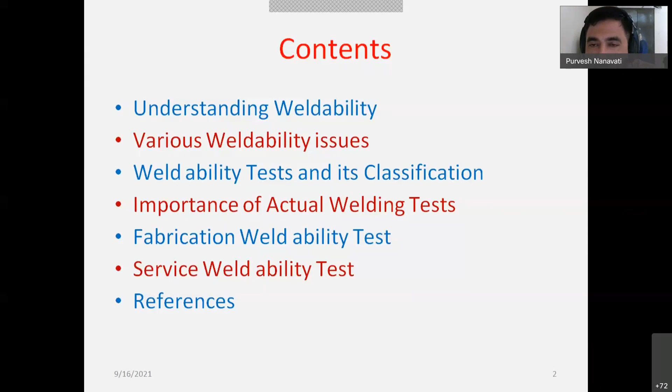On tomorrow, the 17th, during the morning session on weldability, because properly we need to understand the concept of weldability. So how does the American Welding Society define it? It defines it as the capacity of a metal to be welded under fabrication conditions imposed into a suitable designed structure and to perform satisfactorily in the intended service. So it is a complete definition.

It reflects the behavior of a metal or the capacity of a metal, and the fabrication condition is imposed by the arc welding processes, right? Or the processes we go for, whether arc or fusion welding processes or solid state welding processes, and into a suitably designed structure. So for the intended structure, it should perform satisfactorily for the intended service application.

The service applications may be in different areas, maybe high temperature, low temperature, cryogenic temperature, maybe room temperature, and for different parts and components. There are other definitions other than the AWS definition to understand this term weldability. In other terms, it is also known as the ease with which a metal can be welded to give the required service, right?

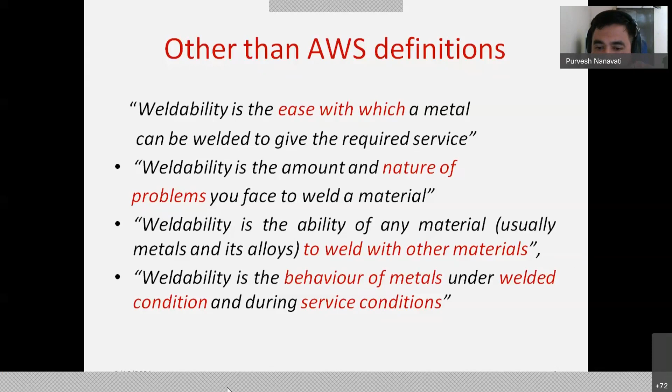Let's wait. Okay. Finally, there are also other definitions, like weldability is most often used to define a material's resistance to cracking during fabrication. Now, this is where the development of various tests comes in, because we need to find out the cracking susceptibility or the resistance to cracking during fabrication. So what can be called good weldability is more resistance to various forms of cracking during welding, requiring essentially no rework or no repair. So we can consider it a good weldable material.

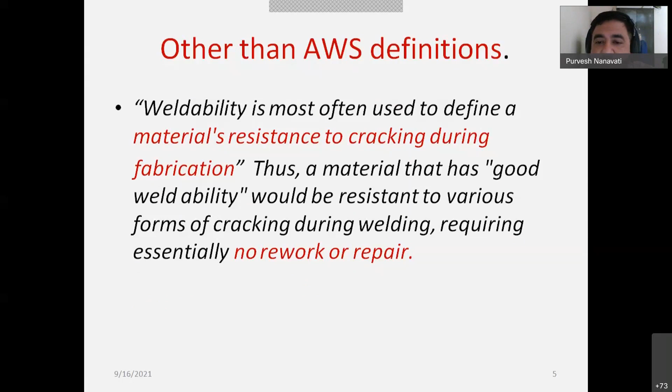Then, let us go through some issues in weldability. I'm not sure whether the previous speakers have told sufficiently about weldability issues, but I thought to slightly touch upon those things to understand the tests of weldability and classification. Anyway, so you have the cracking, right? In the previous slide, I came across the term resistance to cracking.

Now, the cracking can be in the weld or in the heat affected zone. If the cracking is in the weld, it is most of the time known as solidification crack or micro fissuring. And if it is in the heat affected zone, it may be due to hydrogen induced cold cracking, known as hydrogen embrittlement cracking, right? Or maybe liquation cracks or reheat cracks. Now, let me tell you something brief about the cracking in the weld.

Solidification cracks most of the time happen in the root pass or as a center line crack, particularly in austenitic stainless steel welding, or in non-ferrous aluminum or nickel-based alloys. In austenitic stainless steel, the phenomenon is that when there is not sufficient delta ferrite in the solidifying weld metal, 3 to 8% most of the time, then solidification cracking may take place.

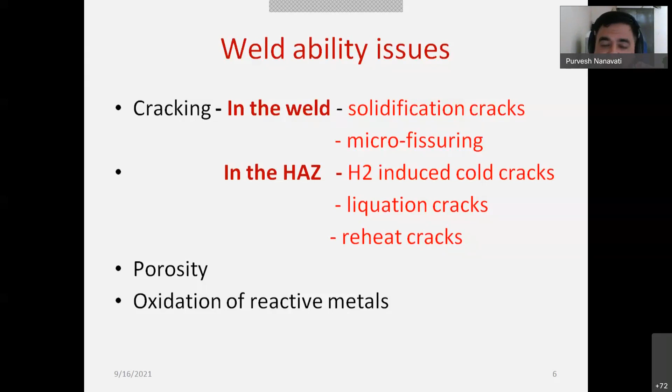Now there are other issues like porosity and oxidation of reactive metals, particularly when you're working with aluminum, nickel; they quickly form oxides like Al2O3, then NiO, then titanium. Okay. Porosity may be because of oxides, maybe because of hydrogen, maybe because of nitrogen gas, most of the time in nickel-based alloys and all that. So there are various issues. We will go through some issues, then we will see the particular tests

to assess the weldability. Then again, the reduced joint strength in the weld and heat affected zone is more of a concern with precipitation hardened aluminum alloys, right? Where there'll be a strength mismatch between the weld and heat affected zone. And there comes reduced corrosion resistance.

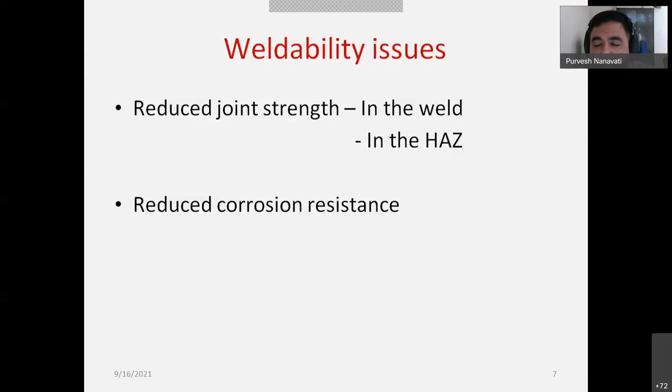This is the consequence of weldability, because most of the time, if you have heard of weld decay, you know that if there is more carbon, if it is not a low carbon grade stainless steel, then the carbon can combine with the chromium from the vicinity of the grain boundary and forms intergranular cracking. So it's reduced corrosion resistance. It's a phenomenon known as sensitization of the weld metal.

Okay, now I have some examples of weldability problems. So oxidation of reactive metals, most of the time, as I mentioned, aluminum, magnesium, and titanium. So you have to provide proper inert gas shielding and active fluxes. Then gas metal reaction or dissolution, when most of the time the weld pool is not protected. You have porosity due to nitrogen in steel and oxygen in copper, nickel, and due to hydrogen, you have porosity in aluminum and titanium based alloys.

Then there'll be vaporization of low boiling metals, right? So porosity in the zinc brasses may happen because zinc evaporates because of its low melting temperature, like 440, 450 something. Zinc evaporates very fast, so it leaves behind the matrix of copper. You have a porosity problem, so you have to use tin bronze filler at low currents.

And hot cracking in the weld, as I mentioned, is due to low melting constituents and impurities like sulfur, phosphorus, lead in the weld metal. These low melting impurities are segregated into the grain boundary. They form a liquid film. So under the cooling stresses, there'll be separation of the grains at the grain boundary, and you have cracking. So you have to use a two-phase filler metal SS electrode with sufficient amount of ferrite, and there'll be hot cracking in the heat affected zone.

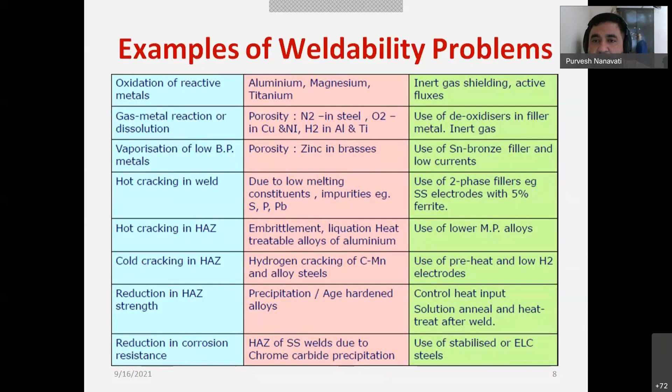Now, having understood the various weldability problems, it becomes important to understand the behavior of a material during welding or after welding during the service application. So weldability is process related. One of the important findings is that weldability is process related.

How? Because the fusion welding process involves high heat input from the arc or the heat source. So there will be solidification of the molten filler metal and fused base metal, and the heat affected zone. The heat affected zone is developed because of the thermal cycle. So there are metallurgical effects on both heating and cooling, because during welding the material is heated up, and during cooling it contracts. This expansion and contraction produces residual stresses, and the material's grain structure is also affected by the thermal cycle. So there is a metallurgical effect due to the heat input, is what I want to convey.

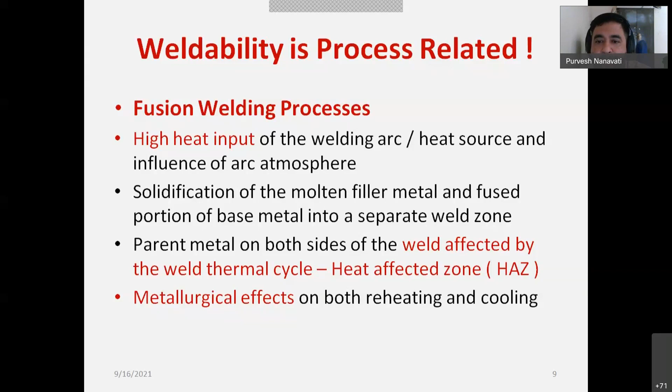Now, materials grouping for weldability. From the practical point of view, when we refer to ASME Section IX or the equivalent ISO 15608 standard, depending on the characteristics of the material, like their weldability, brazeability, and mechanical properties, ASME has assigned different numbers to ferrous metals, and according to their specified impact test requirements, group numbers within the P numbers. So the P number and G number, keeping in mind the behavior of metals, their weldability, brazeability, and their mechanical properties.

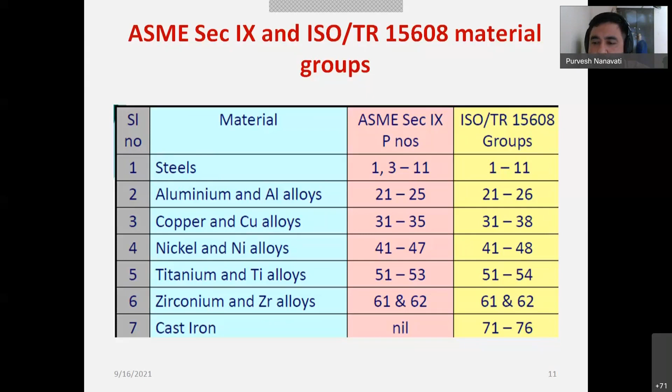As this slide shows, for steel, for example, the ASME Section IX code contains P numbers from 1, 3 to 11, whereas the ISO code differs. Likewise, you see steel, aluminum, copper, nickel, titanium, zirconium, cast iron. So they are grouped depending on their weldability. Why are they grouped? Because the fabricator would find it easy to compare or to join two dissimilar metals and select the filler metal accordingly.

Now, let us go through some pictures of weldability problems. That will be more interesting to know. In the first picture, the top right, first figure, you see hydrogen induced cracking. You see literally a crack. That crack is in the heat affected zone, and it is also known as delayed cracking.

Then second is hot cracking in the weld. That is centerline cracking. You see two plates joined by this weld joint, and at the center you can literally see a centerline crack. This is solidification cracking. And in the third figure, you see a very straight crack.

This crack is lamellar tearing. That is most of the time found in rolled steel or in steel containing some amount of non-metallic inclusions. So this picture is lamellar tearing. I wanted to introduce these pictures for a better explanation of the weldability issues.

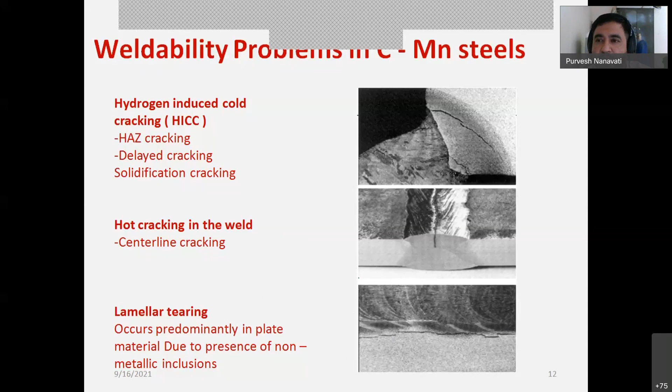Now we will move on to our main topic. By this time you better understand this. There are many issues. Actually, I could include 3, 4 more pictures and many such details of the weldability issues. So now we'll move to the classification of weldability tests, how they are classified. And their classification is very logical in nature.

So first, weldability tests are classified into 5 subtests: theoretical test, simulated test, visual examination, component sampling test, and actual welding test. Now, the actual welding test is again bifurcated into fabrication weldability test and service weldability test. These are of most interest because theoretical, simulation and visual tests may or may not give a clear picture of the weldability or the behavior of metals during welding. So it is more accurate to go for fabrication weldability test and service weldability test.

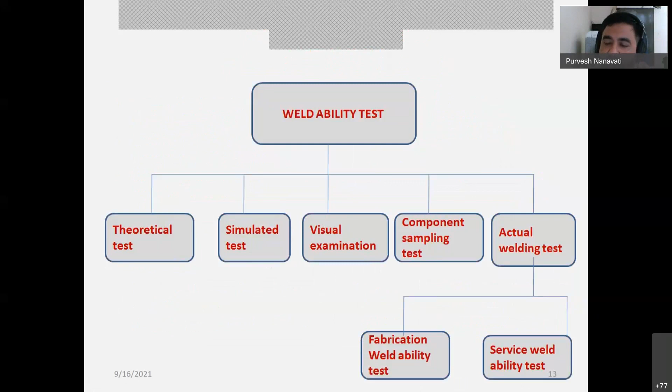Why should we go for the actual weldability test? That reason I'm going to explain just now. Actually, my slide has it: why prefer the actual weldability test?

Because the theoretical weldability tests do not take into account all the welding variables, right? Like in a previous slide, I'm going to explain some theoretical calculations. Now, I think we'll be able to understand better after this slide only.

So you can see that for carbon steels and low alloy steels, their weldability is judged by an empirical formula. It is well established, known as carbon equivalent. It is a formula reflecting the composition of the steel: carbon, manganese, chrome, molybdenum, silicon, nickel, copper. So you can understand these are the alloy elements having an effect on their weldability. So the higher it is, the more hardenable the material, right? And higher will be the susceptibility to brittleness, and at the same time lower will be the weldability. So it's a thumb rule, right?

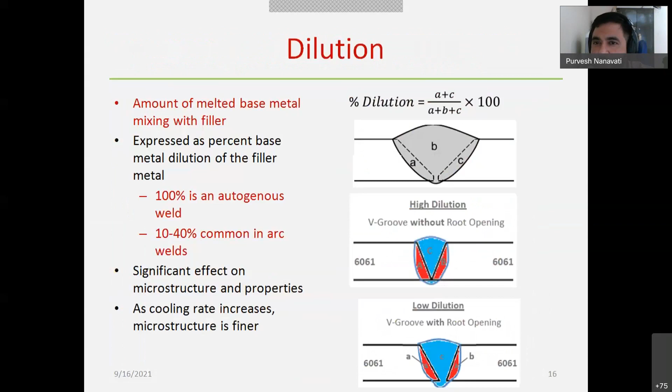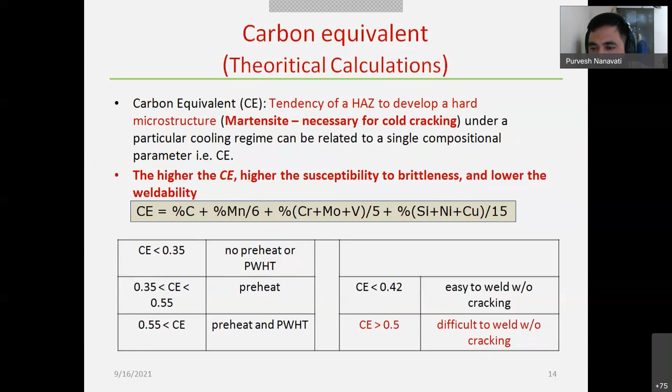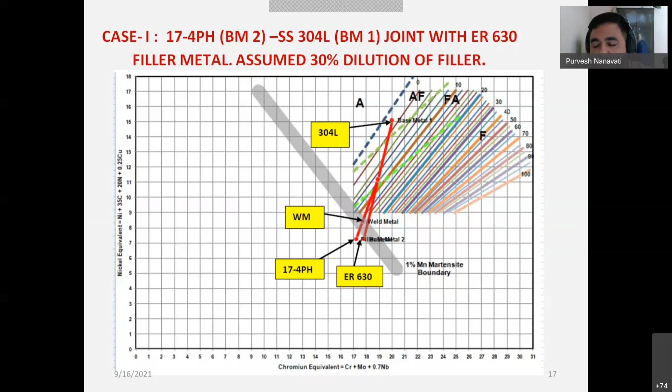Now moving further. Having discussed these theoretical tests, carbon equivalent and assessment on the WRC 92 diagram, you may realize they do not take into account the welding variables. Indirectly, we assume some dilution depending on the heat input. But during the actual welding process, heat input has a tremendous effect, and it may be different.

So these predictive diagrams will not give a clear picture, but they are mostly used for predicting whether the materials will be weldable or not. Otherwise, you have to go for the actual weldability test, the procedure qualification test. You have to prepare the test coupon, and if it satisfies, then your welding procedure specifications are approved.

And this will not take into account the welding variables, effect of preheat, electrode composition, and many more things. And on top of it, residual and reaction stresses, hydrogen induced and other conditions during heating and cooling. You may consider welding as a localized heating and cooling.

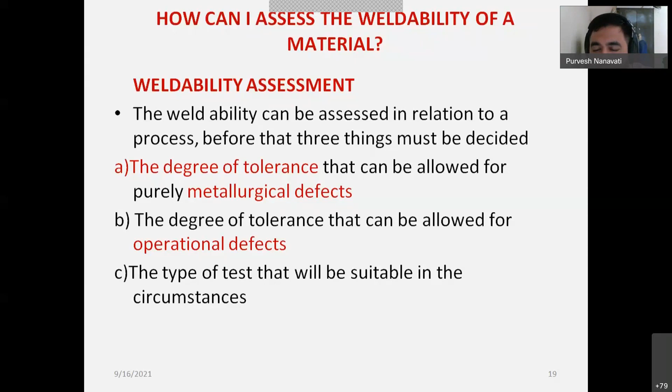That we will be discussing during our presentation. Now, fabrication tests, because fabrication tests are meant for determining the susceptibility of the welded joint to cracking, and they are grouped into three main categories. First is hot cracking test, second is cold cracking test, third is a test related to cracks associated with specific fabrication conditions or structures. The third is a very specialized or customized test. First and second are hot cracking test and cold cracking test.

Before we go further, what is a hot cracking test? It is the crack that may take place during or immediately after welding. What is a cold cracking test? It is the delayed crack, or the crack that may appear after the welding is over - it may happen anytime after welding is over, whether seconds, minutes, hours, months, or any time. Most of the time this is hydrogen-induced cracking. The third is a customized test, depending on our requirement.

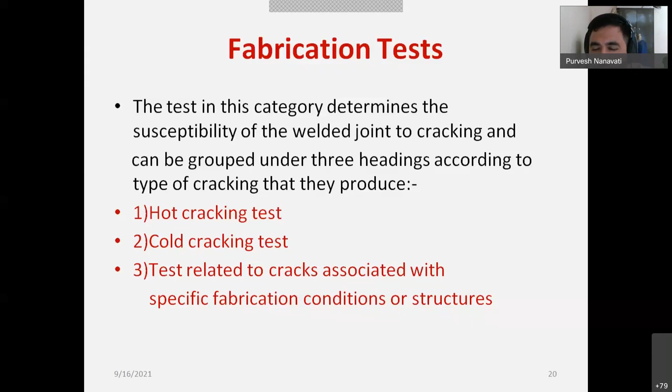Now, fabrication weldability tests under the hot cracking test include various standard tests like Murex, Houldcroft, Varestraint test, ring weldability test, Sigma jig test, and hot ductility test from A to F. And in cold cracking test, there are tests from controlled thermal severity test (CTS test), Tekken test, Lehigh restraint test, longitudinal bead weld test, and implant test.

Now we'll be able to discuss A to E, under the red square, and for cold cracking test, A, B and D. If time permits, we'll be able to go through all these tests, but these are the most popular tests. Out of these, I would say the Varestraint test and Sigma jig test, and the developed version, the ring weldability test, are most popular. They are used most of the time. For cold cracking test, the CTS test and Tekken test, and to some extent the longitudinal bead weld test, are the most important tests I am going to discuss in this presentation today.

Okay, now to begin with the Varestraint test, the first of the hot cracking tests. Okay, so... sorry, my slide stuck.

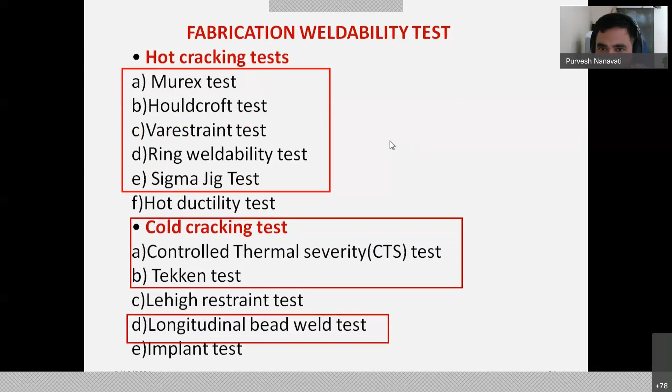Okay, now, Varestraint test. You stress the word Varestraint. The word variable, VA, comes from variable, and restraint comes from restraint, right? The Varestraint test. So you can understand from the first impression that this is a test in which we have to vary the restraint. I hope, being from a metallurgical or mechanical background, you better understand restraint, because I've mentioned the restraints posed by the surrounding base metal during heating and cooling. So we are inducing a mechanical restraint here, to assess the weldability of a material under mechanical restraints.

So, long back in the mid 1960s, W.F. Savage and C.D. Lundin, from the Rensselaer Polytechnic Institute, designed a way to assess weldability of materials in terms of hot cracking tendencies. They were the first to term the hot cracking tendency. So this test is used to quantify and rank a material's susceptibility to hot cracking. When you have a number of materials, guidelines are available so that you can rank materials depending on their susceptibility to hot cracking.

And then there are many modified versions, extensions, and modifications to the basic Varestraint test - longitudinal, then transverse, then spot - and these were all developed gradually over time to effectively quantify or assess the mechanism of the crack. Because, as you know, most of the time this crack develops because of the eutectic liquid. I had mentioned previously that because of low melting point elements present in the solidifying weld metal, the grain boundary will be wet by the eutectic liquid, and it backfills the crack as a function of eutectic composition. The eutectic composition is very interesting to know, and there is plenty of research ongoing even today in this area.

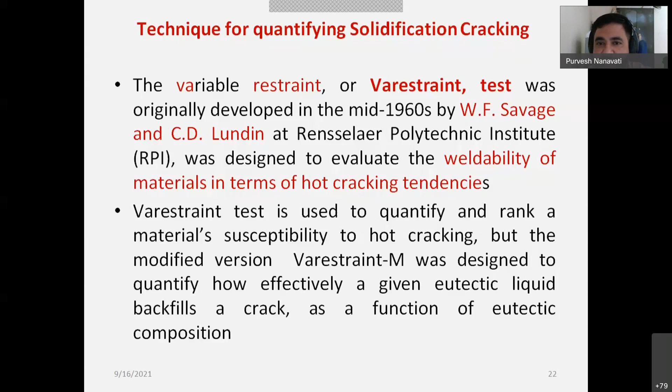So, moving ahead, the first and most basic test is the Varestraint test. This test's basic setup looks like this. What you see on the left-hand side figure is an 8 by 4 inch plate, and you see the weld joined longitudinally, and this plate is fixed over here. Now it is free at this end, just like a cantilever beam. When the arc moves from the free end to this end, most of the time, through the help of a plunger from the top, it will be bent on this die. This die has a designed radius on which it will be bent, and you will be studying this area, particularly your molten weld pool.

This molten weld pool is the area of your interest, and you will check it for the development of cracks. You can better see this in the enlarged view - this is where weld deposition started, and this is where the weld ends. By the time it's solidified, the force is applied at its free end. As a result, there will be a sufficient amount of strain - we'll call it augmented strain - developed on the fusion zone and the heat affected zone. So, depending on susceptibility to crack, or the chemical composition, the material may or may not develop a crack.

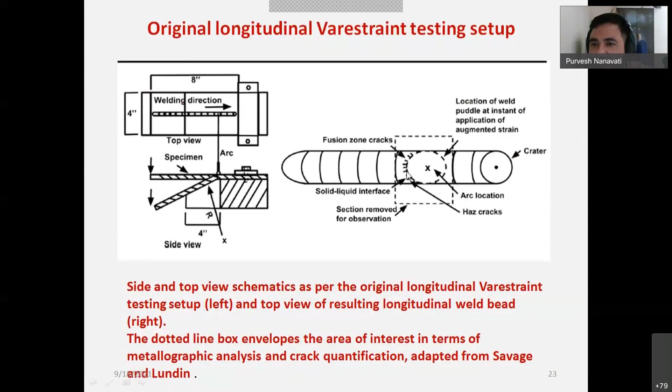And this type of test produces cracking in both the fusion zone and adjacent heat affected zone. You could see this from the previous picture. This is because of the bending stresses produced by the applied force from the top. What will happen? This area will be bent, and so the fusion zone and the heat affected zone will be under stress.

Now, moving ahead, what do you see? It is sometimes very essential to know whether the crack is originating from the fusion zone or from the heat affected zone, or whether it is HAZ liquation cracking or solidification cracking. Because we knew from the previous slide that solidification cracking takes place in the weld metal most of the time, and liquation cracking takes place in the heat affected zone. So it is difficult to separate out. So this is a limitation of this test.

No, sir, it's not visible because you have just shared the Microsoft PowerPoint presentation screen only. If you will share your entire screen. Okay. I think I need to share the screen for video, right? Yes, sir. Fine. And now I got it. I think I should stop share, and I need to share video again. Just wait. Please spare me 2 seconds to do this. Now, what I'm going to share is a VLC media player screen. There we go. I think now the screen is sharing, right? Am I right? Yes, sir. Screen is visible, sir. Okay, fine.

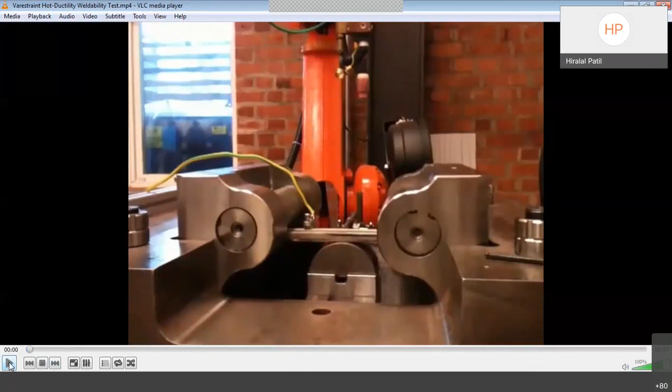Let us go through this video. So you could see a positioning of the torch. So you could see a transverse Varestraint test. Now the arc is started and welding is started. Now, as soon as it reaches a certain position, there will be a pressure from both the rod, from both its ends. Oh yeah. Now you hear literally a sound of cracking, right?

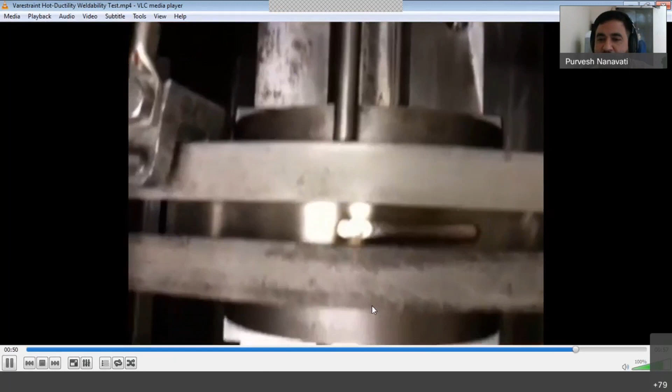Now you are going to see what actually happened on the top. I hope this video will take us over there. Let us take a look. See, did you see the kind of cracking? Yes, here, a small crack, right? A very small crack, may not be clear. Would you like to see it once again? Please have a look. Oh, right.

Now there are many such videos on YouTube. You could have a look at them. I could only include this Transvarestraint test video for you, just to give you an idea. You see this is a mechanical... You see a thermocouple wire, right? This red and blue color. Sorry, I was late to show you, but I think you must have observed it very closely. You must have observed the test setup.

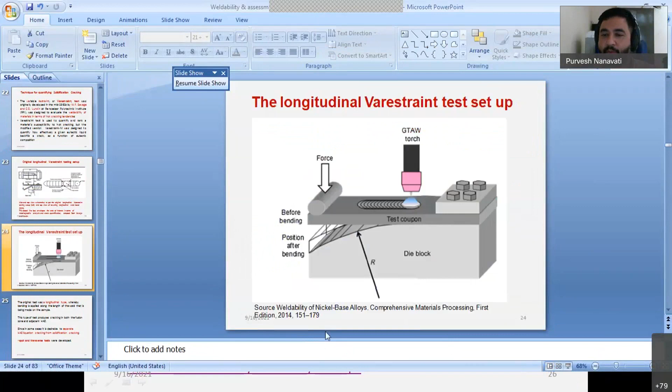Now I'm going to stop the video and share my screen once again. Sorry, I think I need to go to the slide where I stopped. There we go. I was here. Can someone please confirm whether the slide is visible? Yes, sir, the slide is visible. Fine, great.

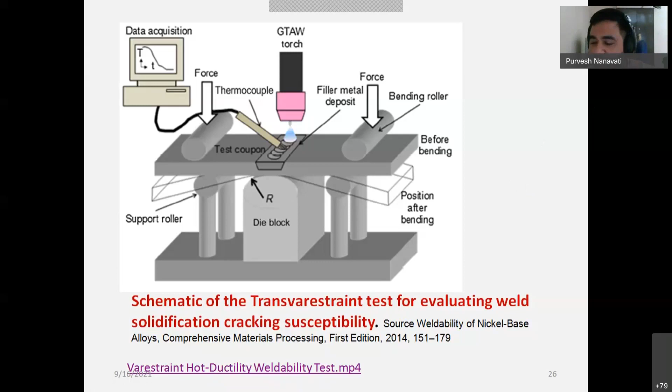Next, Transvarestraint applies bending stress across the weld and restricts the crack to the fusion zone. So there is little or no strain applied to the heat affected zone. It is in the transverse direction, right? So most of the stress will be concentrated on the fusion zone and less on the heat affected zone.

So there was a further modification, the spot Varestraint-M test. M stands for modification. It's a modification to the original test where only a spot is welded, and this small spot weld develops a susceptible adjacent microstructure. So you simulate a heat affected zone using a spot weld, and this spot weld will have an adjacent microstructure.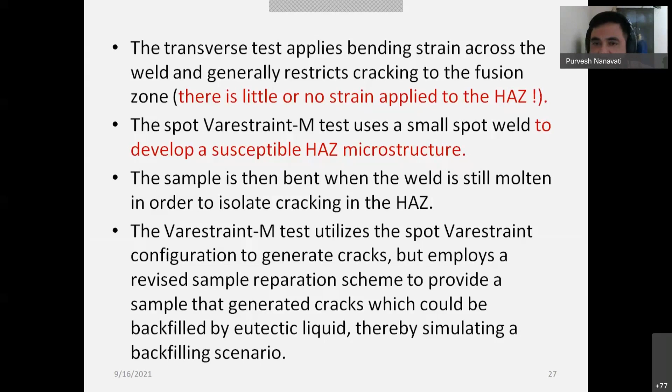The test setup is something like this, as you see in the picture. Instead of making a weld on the line, you see that only the weld is made on the spot. I'm trying to use this cursor. It automatically went up. Now you see that only a spot weld is made, right? And you must be seeing that there is a HAZ crack.

So this is a more accurate test to judge the susceptibility of cracks in the heat affected zone in comparison with the previous transverse test, right? Because the limitation of the transverse test is that most of the stress is concentrated on the fusion zone. This test will produce stress on the heat affected zone. So it goes with the same test setup, right?

And now you see a formula over here. I'm coming to this formula, but this is a schematic illustration of the Varestraint test setup. All these sources I have taken from Dr. J.C. Lippold's book. It's a very popular book, Welding Metallurgy and Weldability of Steels. At the end of the presentation, I will also mention his latest work on the assessment of weldability of metals. Okay.

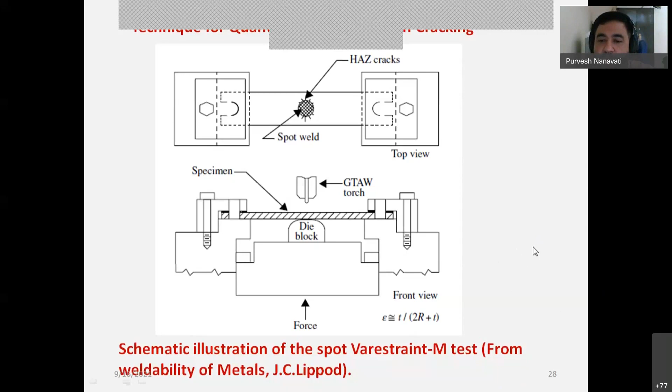So this is a picture from the same book. It is a A-286 stainless steel at 5% strain. The strain is also calculated here, at a 5% strain. You would literally see a crack in the heat affected zone, right?

This is the HAZ, and this is a spot. This is the weld nugget, and surrounding it you see a less dark region, which is the heat affected zone, and in this heat affected zone the crack is formed, right? So it is a spot Varestraint test sample in a plan view. This is sourced from the same book.

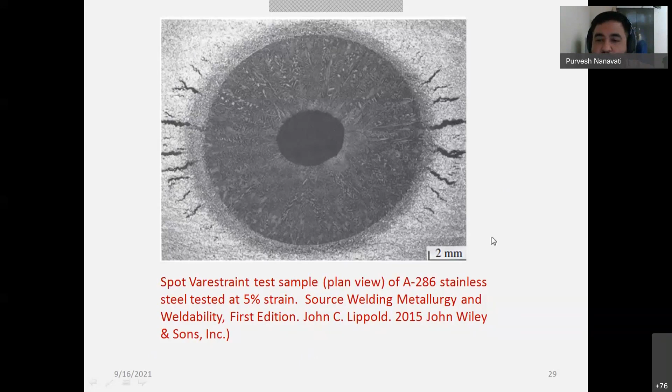Okay. Now you would have seen that in most of these tests the GTA welding process is used, but you could also include other welding processes. First, the standard is the GTAW welding process. Otherwise, you could customize it using your other tests as well. But this could be without filler metal deposition. So these tests are usually autogenous, because you did not see any filler metal, right? You did not see deposition of any filler metal or dipping of any filler metal into the weld pool.

Only the arc is generated and the arc is directed on the test coupon and the test is conducted, right? But filler metal deposits can be tested using special samples. There is a provision that if you want to find the compatible filler metal, you could first develop a molten weld pool and dip your filler metal just like GTAW standard practice. You can carry out this test with the help of filler metal. So you can qualify filler metal for the particular test setup.

And the bending is normally very rapid, right? Only 2 to 10 inches per second. So it's a very fast bending. You could see it in a video. And now, the most important quantification part is here. The augmented strain is controlled by the use of interchangeable die blocks. Augmented strain means the varying degree of strain, because we have known this word Varestraint, so variable strain. Augmented means which you can keep on changing by changing the die blocks.

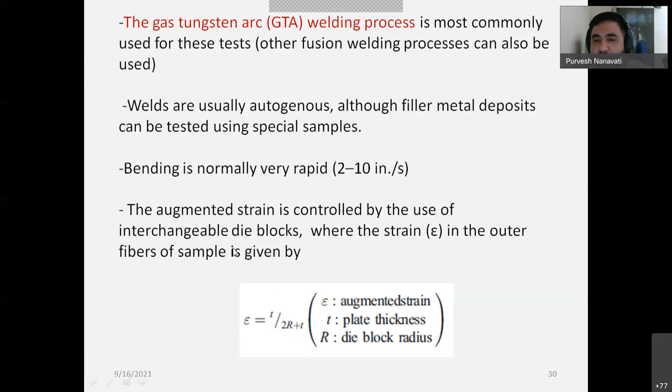So now, measurement of crack lengths on the surface of the as-tested sample using a low power microscope. How would you examine the crack? Using a low magnification microscope, with a 20 to 50x microscope. And the total crack length is the summation of all crack lengths. There are various concepts like TCL, total crack length, MCL, maximum crack length, and the most recent concept is maximum crack distance, that is MCD.

Now, most people measure MCD, maximum crack distance. Previously, people were measuring the maximum crack length, then summing the different crack lengths. Now they have come to the conclusion, by years of experimentation, that the most accurate is to measure the maximum crack distance, MCD, the distance through which the crack has propagated, right? MCD. Okay.

Sorry, my slide is not changing.

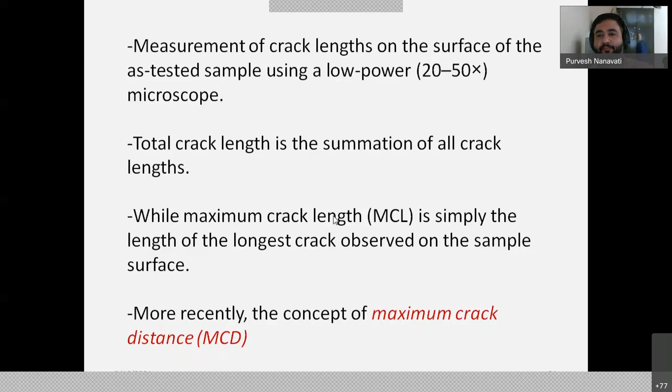Okay, now, what is the technical concept behind this test? We have seen this test in slides, we have seen visuals also, but we also need to understand the technical concept behind the test, right? So I included this technical concept because we are estimating the saturated strain. I hope you understand why the word saturation, because saturated is something which is sufficient, right? Saturated means complete in itself, saturation.

So look at this graph, which is developed as a result: maximum crack distance, MCD, versus augmented strain. When you plot a graph using these two, you would see that for solidification cracking in the fusion zone there'll be some amount of strain already. That is known as threshold strain. It means you require some strain to develop the crack, right? There is only initial cracking. That is known as threshold strain.

Now, you will be entering a different region of augmented strain. It means you go on changing the die radius, and you try to see after which level of strain your maximum crack distance becomes constant at an augmented strain level, right? So you could understand that below is the augmented strain.

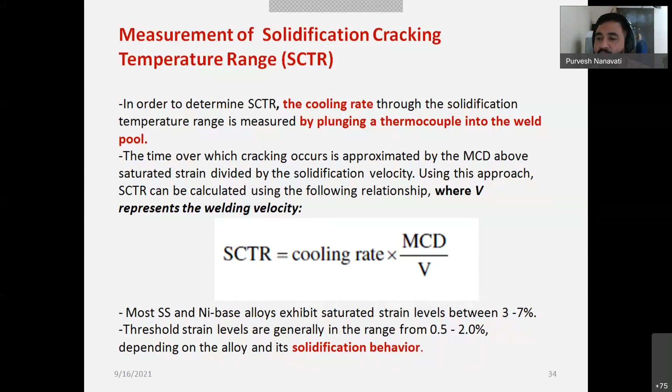For stainless steel and nickel based alloys, saturated strain levels generally range from 3 to 7%, and threshold strain levels from 0.5 to 2%. It means you require 0.5 to 2% minimum strain to develop the crack, and your sample made of stainless steel or nickel based alloy will show a saturated strain level. It means the maximum crack distance will become constant after, say, 7% strain level, as per the previous slide, right? I hope everyone understands this.

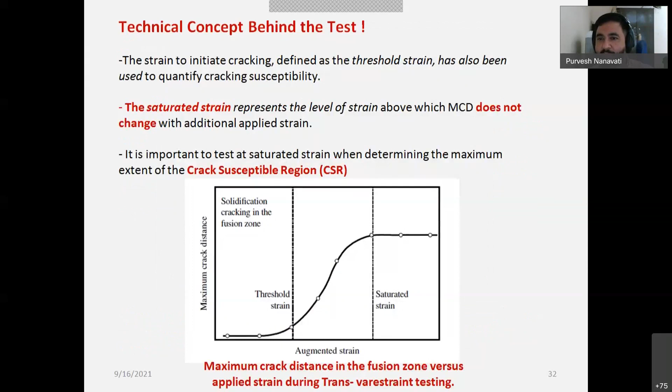It means if you have a thermocouple, a temperature monitoring system and a stopwatch. These days these are all automatically done, and this formula is also automatically calculated, but these are the technical fundamentals I thought to explain with the help of this very well-written book. Okay, now you will see this

So you could figure out this SCTR by multiplying the cooling rate with MCD divided by V. As a result, you will see a particular band or zone where there is highest susceptibility for cracking. TL stands for the temperature of liquidus, and TS stands for the temperature of solidus. So this is the range which is most susceptible, in which a crack can happen. Okay, this is how it is calculated.

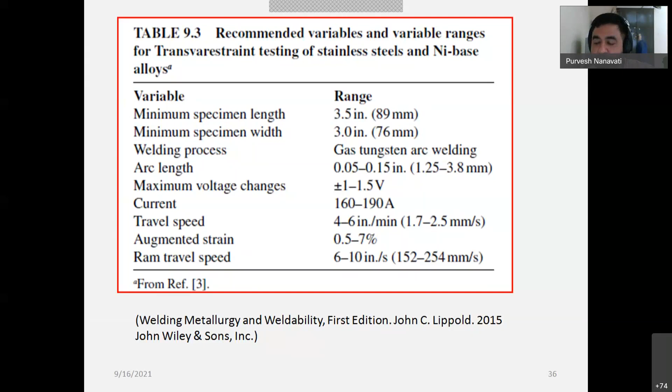Now, this is the most important information I have captured from this same book, table 9.2. You would see there is also a role of solidification mode. Because in the previous WRC 1992 diagram, I pointed out A, AF, FA, and F. These are the different solidification modes. A means the weldment undergoes solidification completely as austenite. AF means primary austenite, secondary ferrite. FA means primary ferrite and secondary austenite. And F means it is fully ferrite.

For example, austenitic stainless steels like 304, 316 most of the time solidify in FA mode, and hardly in AF mode. But the ferritic-austenitic duplex stainless steels solidify in F mode. Likewise, you can see 304 and 316 have a primary solidification mode of ferrite. So when the primary solidification mode is ferrite, there is no danger. You could see there is a smaller solidification temperature range.

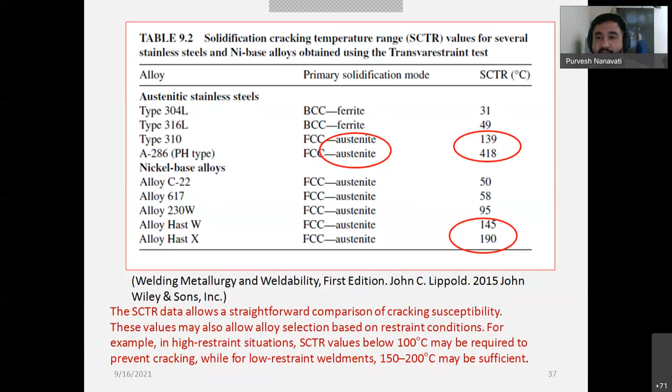Now, how is this test performed? This is another test, the circular patch test. It is meant for austenitic stainless steel and aluminum welds most of the time, and most of the time it is done in the industry; it is industrial practice. What they do, people here may start with some block of say 1 inch or 1.5 inch or say 2 inch thick block.

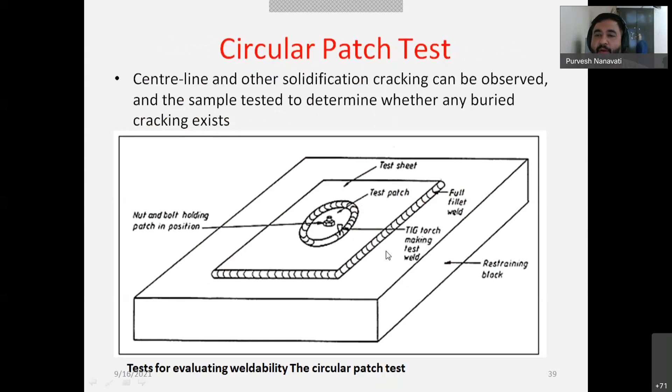Now you can understand the test material is positioned so that the gap around the test patch is constant. Because you would see the gap is continuous, right? The gap is constant. From all sides of the test piece, you could see that the distance is the same, right? Now, the weld between the patch and the original plate is made following the circumference of the patch.

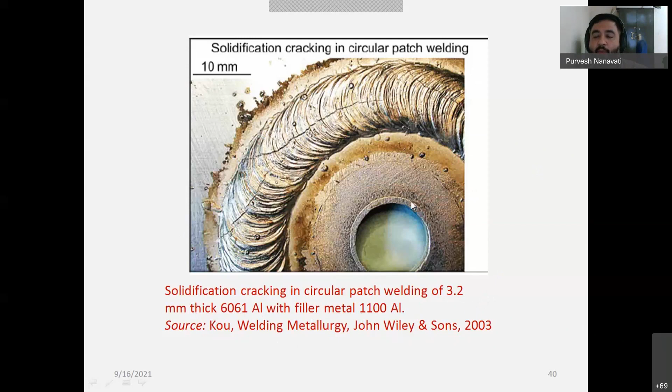You could see a crack, and at this scale of 10 millimeters, you literally see a large crack of centimeter size, right? This is solidification cracking in circular patch welding, right? Now this is a figure of circular patch welding of 3.2 mm thick 6061 aluminum with filler metal 1100. So this base metal was 6061, an aluminum silicon magnesium alloy, and 1100 is the filler, right? Another case is a hot cracking test or Murex test.

This test setup is not complicated to understand. You will see a plate of say 10 to 15 mm thick, and the test plate is 50 to 70 mm in width.

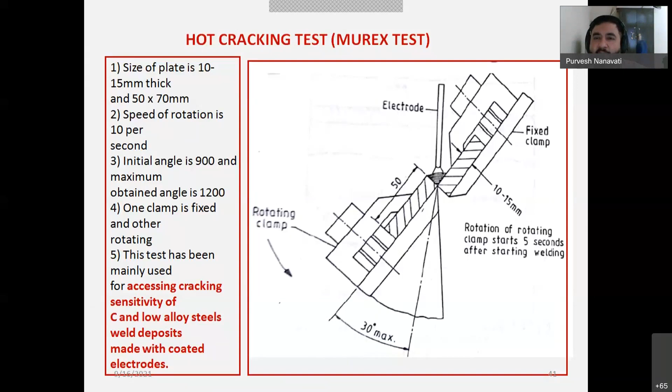This is known as the Murex test, named in honor of the inventor, but it typically falls under the hot cracking test category. It is the same information.

After 5 seconds it is bent, at 1 degree per second, and rotation is 30 degrees, and strain is developed. The length of crack that appears after straining is measured.

This test is used for obtaining comparative information on similar or dissimilar welding fillers. It means if you are joining two different materials, carbon steel and stainless steel, and you go for 308, 309, and you want to figure out the correct substrate with 308, 309, or 310, then you can go for this test.

You get comparative information, but you can use different brands or different manufacturers' electrodes and have a comparison on the ductility of the weld metal. You could do this using this Murex test. This is a practical application.

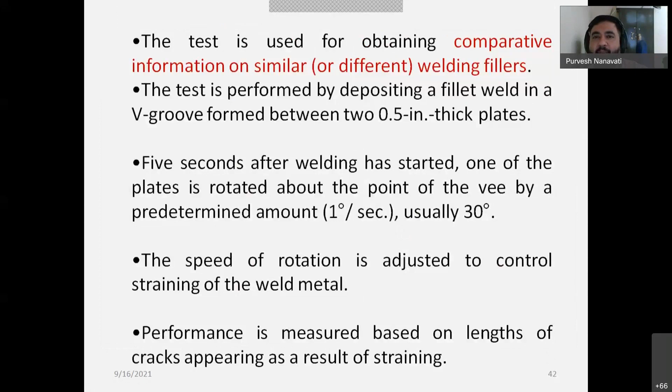Now, next is the Houldcroft fishbone test. Now you understand the word fishbone. This test plate is of a typical type.

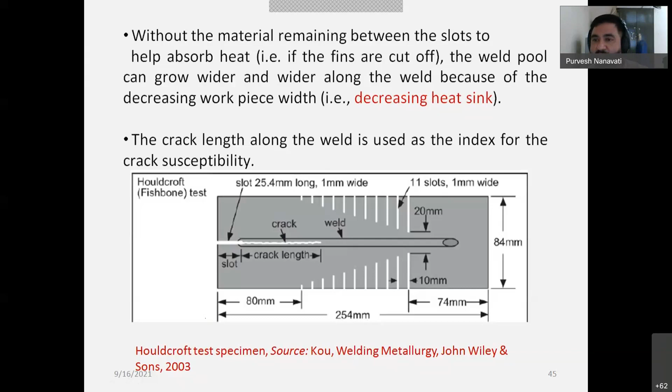This Houldcroft, or fishbone test, is the index for the crack susceptibility. Crack length along the weld is the index for the crack susceptibility. This is a source from Sindo Kou.

Now, the Sigma Jig test. This is, most of the time, the latest test developed by the Oak Ridge National Laboratory. It is the latest test because it overcomes the limitations associated with the Varestraint testing, particularly thickness limitations. I would not say the Varestraint testing is no more valid; it's a very much valid test. It is the most accurate test to assess the susceptibility of different materials.

But it has limitations associated with thickness, particularly thickness greater than approximately 3 mm. You can go for the Varestraint test. But if your thickness is less than 3 mm, you will go for another test, that is the Sigma Jig test. So for the Sigma Jig test, you can go for thin sheets of material, like 50 by 50 mm, clamped in fixtures.

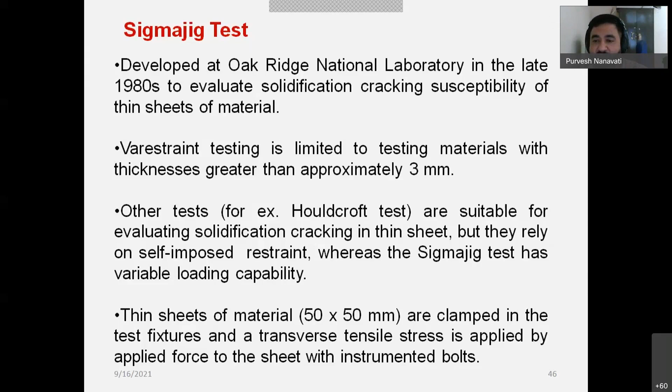Not only one but multiple coupons can be evaluated in the course of this qualification test. When you go for multiple coupons, you have to identify the low stress level for the first test sample. Then this will be linearly increased in each subsequent sample until centerline weld solidification crack is initiated.

So you first start with the test sample at a low stress level, then you start increasing your stress level, going up until your centerline weld solidification crack is initiated. It means you start with say 3%, 4%, 5%, and say at 7% or 11% your crack is appearing - that is your stress level.

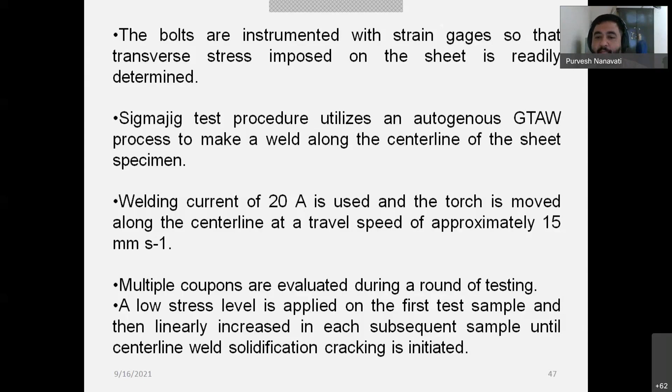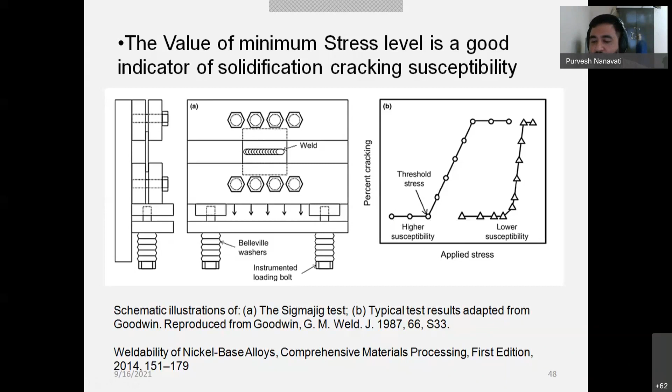Now we'll move to a cold cracking susceptibility test. I think I need to conclude the session in 10 to 15 minutes. Until now we have discussed the hot cracking test; now we'll go for the cold cracking test. You know that the cold cracking test examines the susceptibility of material, particularly for hydrogen-induced cracking, because these are delayed cracks - they don't take place immediately during or after welding, but after some time, under cold cracking conditions.

So most of the time the focus is on HAZ cracking, and there is a CTS - controlled thermal severity test.

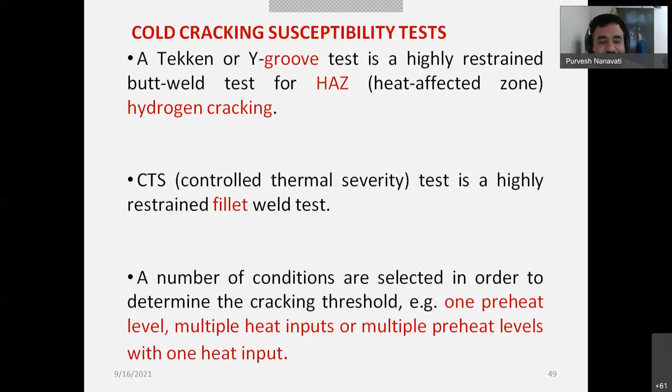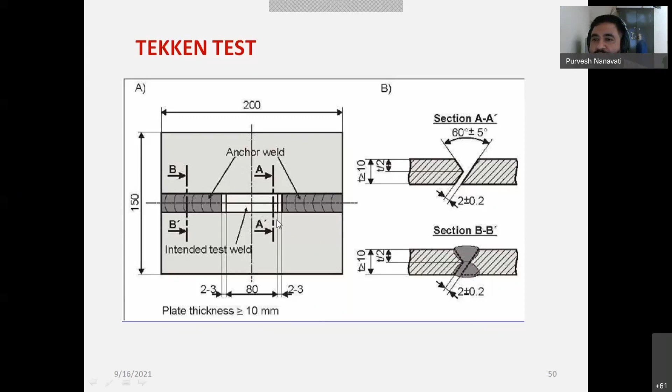This geometry, the Tekken test, is used to examine a single run butt weld, determining the preheat temperature required for the test condition. Because when you have a preheat, the solidification time or cooling rate is controlled, so the hydrogen has a chance or opportunity to escape out of the weld material or weld metal. As a result, there will not be traces of entrapped hydrogen, and you will be free from any possibility of hydrogen-induced cracking.

So this is the objective of the test. For the number of test coupons, you can go for 1, 2, 3 for each condition, and decide the preheat temperature - you start with some 25 degrees Celsius, 30 degrees Celsius, going on checking different preheats and the possibility, but the test duration is more than 16 hours.

Test duration is more than 16 hours because you have to see the cold cracking - you have to examine the cold cracking susceptibility. So you have to wait up to 16 hours to observe the test coupon for crack development.

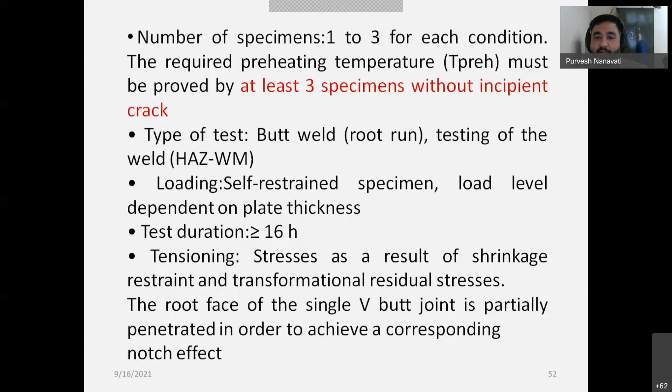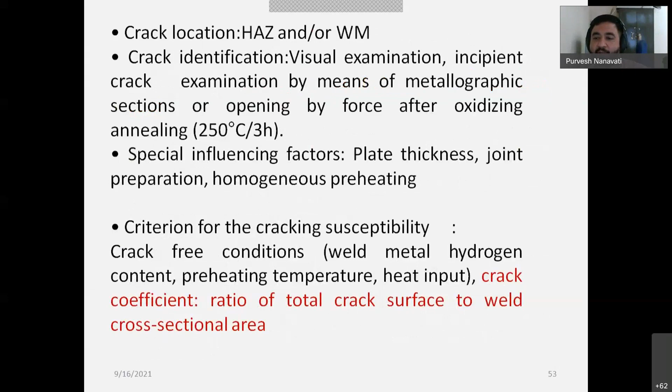Now, crack location is the heat affected zone, obviously, because the thermal cycle affects most of the time the heat affected zone, where martensite would be developed, and martensite is a very hard microstructure and brittle phase. So hydrogen can reduce in it and have more effect on HAZ. Now, the crack coefficient - ratio of the total crack surface to the weld cross-section area - is a criteria for the cracking susceptibility. Now, another test is the controlled thermal severity test, CTS.

So, controlled thermal severity test, I'll explain in brief. When the heat source is moving, the plate is throwing out the heat, right? So, depending on the section thickness, there is a thermal severity number, TSN number. So for a 6 plate thickness, TSN is considered by standard as 1.

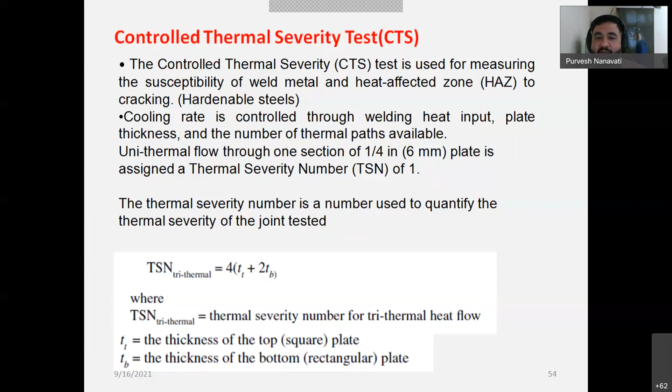So TSN for the tri-thermal, it means when the thick sheet is there, along the thickness and depth direction, heat will be dissipated. So using this formula, you can calculate the thermal severity number, but you can consider 1 for the 6 thickness. So, controlled thermal severity test, how the test setup will look like. You have to just weld this test coupon with the anchor weld. These are known as anchor welds, right? And known as restraining welds also, because here you are restraining the heating and cooling of the weld, right?

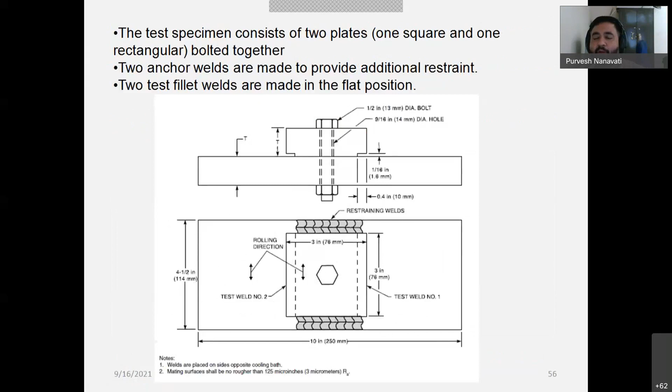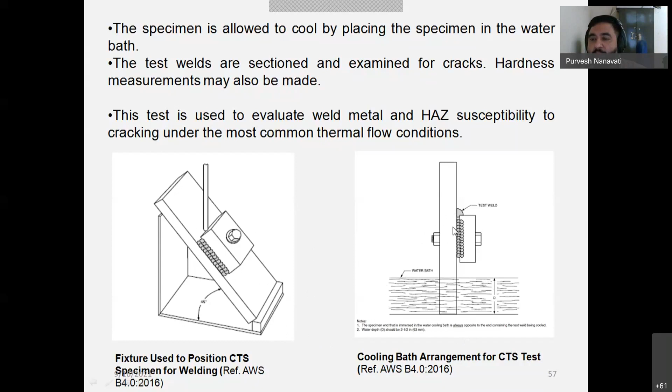Now, what to do? First, you finish the weld. Now, in a particular fixture, the fixture is just like this. It is a fixture at a 45-degree angle. That is as per AWS B4.0. Most of the time, weldability tests you will find in AWS B4.0. When you finish the weld, you have to put the specimen into the water bath, keeping the weld joint part without touching the water, right? So in this way you have to put the test specimen.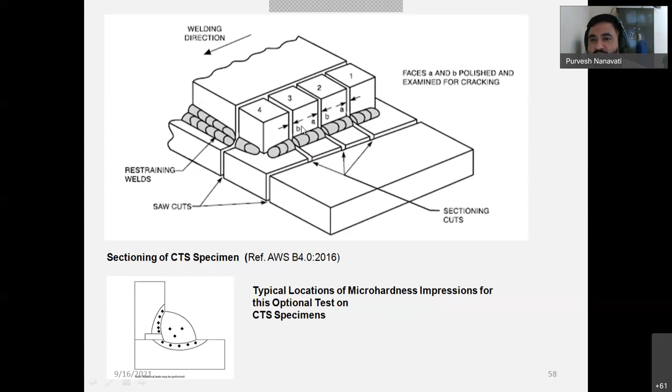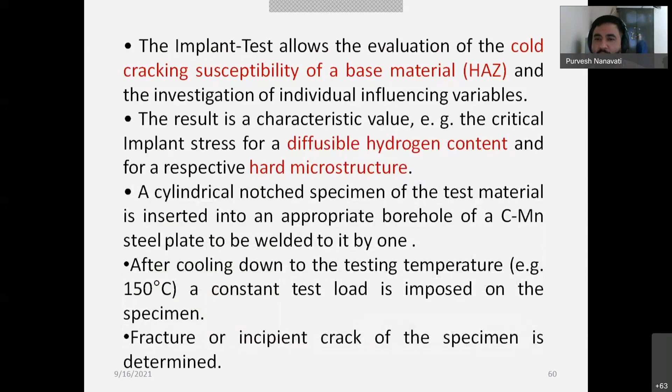You will perform this test, and you will subject it to tensile stresses, and you will assess the cracking susceptibility of the base metal. Particularly, after cooling down to 150 degrees Celsius, the constant test load will be imposed on the specimen. This specimen is subjected to constant load F. You will apply the load and see at what point it cracks. Now, after cooling to room temperature, below 150 degrees Celsius, you have to examine for the fracture, right? So it's showing the cold cracking susceptibility.

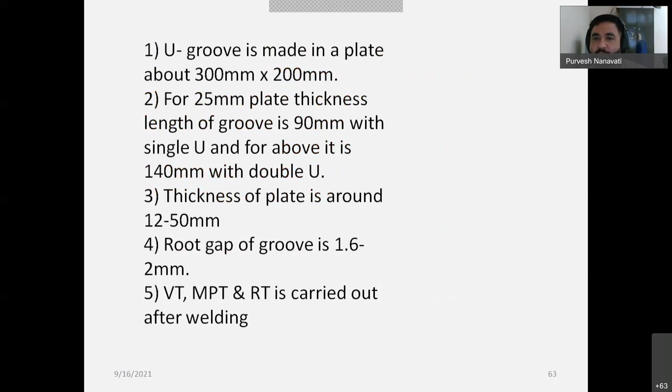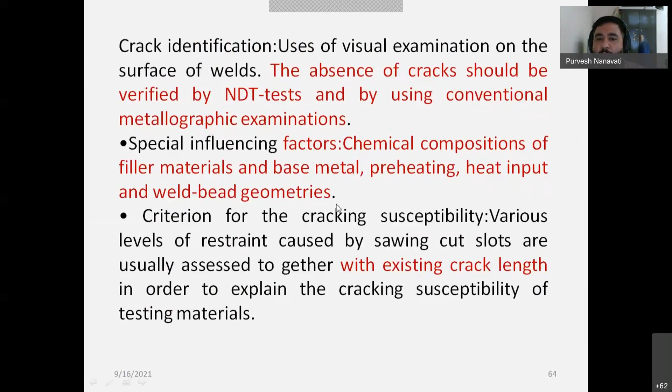Now, this is information on how you can do it, and crack identification is by NDT method. When you perform this weld, you have to observe these cracks by the NDT method because these cracks will be very fine in size, invisible to the naked eye. So you have to go for the NDT test and conventional metallography examination, and you can work out the chemical composition of the filler metal and base metal, preheating, heat input and weld bead geometries using this test.

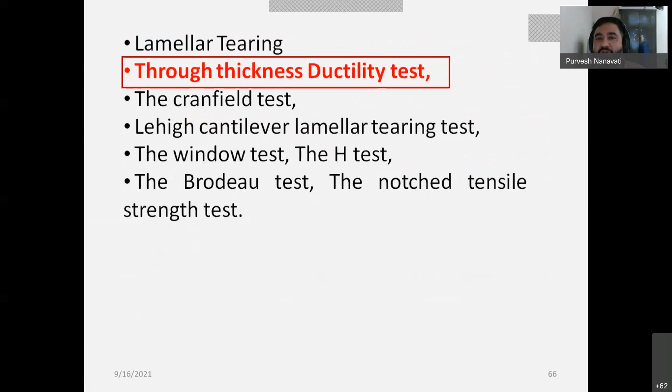So other tests are for lamellar tearing and reheat cracking. These are for the heat affected zone. And one test is the through thickness ductility test. That is most of the time for determining lamellar tearing. Now, this is just a test schematic. You could see, not in a transverse area but in a longitudinal direction, your specimen will be like this, opposite to the rolling direction. And this is a typical test specimen dimensions.

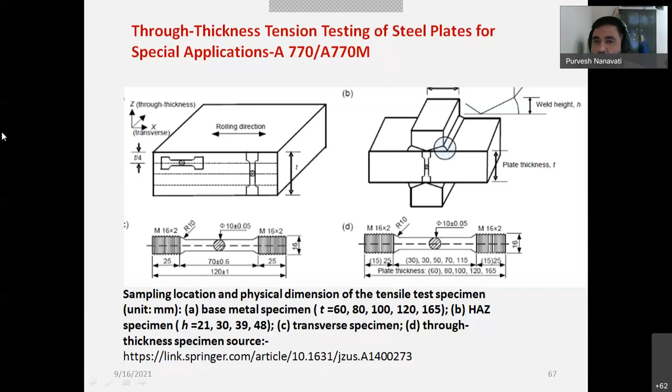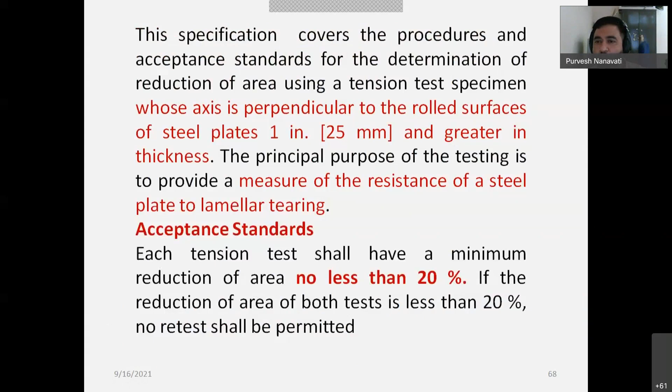Now last is the hot tensile test. This hot tensile test is conducted in a simulated weld thermal cycle. So what do you do? You apply heating and cooling. Likewise, you see temperature versus time. You see heating, and cooling between 800 and 500. Okay, fine.

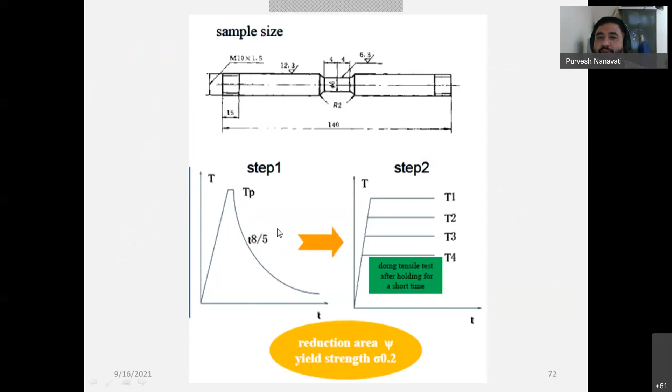So last test is a bend test, right? Actually, I'm running out of time. I think by 5:30 I should conclude this.

Now, this test is the most accepted test, and most of the time this is done by the welding industry as a procedure qualification test, QW 160 bend test, with 90 degree, 120 degree, and 180 degree bend tests. Depending on the positioning of the root, the positioning of the stretched fiber, it is either a root, face or side bend. For thickness greater than 12 mm, you will go for the side bend test.

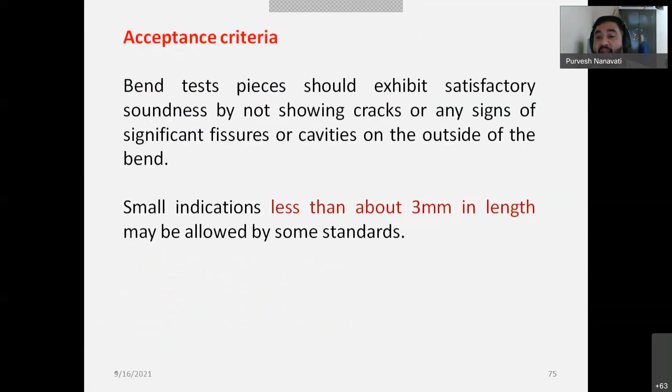And the acceptance criteria is that the crack should not be more than 3 mm in length in any direction, right? So the bend test is a satisfactory test in industries for measuring the soundness of the material. Okay, now coming to the next and latest part of our presentation.

Nowadays, thermal simulators are available. The Gleeble thermal simulator is a very state-of-the-art technology to assess the weldability of the material, and most of the investigations were contributed by Emeritus Professor John Lippold from the Ohio State University, Columbus, USA. Using this test, you can assess the solidification behavior and cracking behavior in the weld metal and in the heat affected zone using the Gleeble simulators.

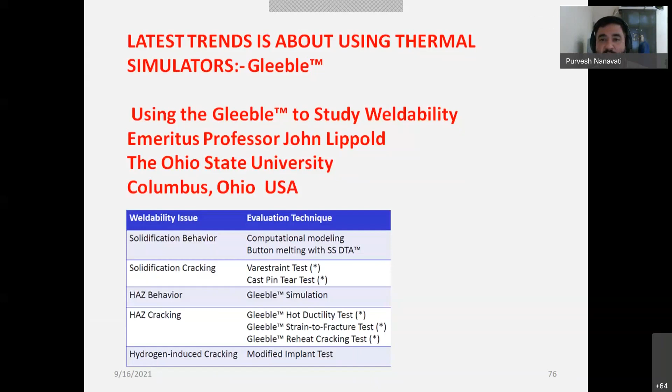Different simulator versions are able to perform the hot ductility test, strain to fracture test, reheat crack test, and all this, right? So if your institution can afford this Gleeble thermal simulator, I would recommend this test. These tests are rather costly, but most of the time available with many leading institutions, perhaps with IIT Bombay and many IITs.

With these simulators, you have a very high research opportunity using this state-of-the-art device, and there is scope for plenty of research, welding metallurgical research, using this facility.

So, as a summary, these are weldability test methods: Varestraint test for hot cracking susceptibility, Lehigh restraint test for cold cracking, implant test for hydrogen assisted cracking, oblique Y for HAZ cracking, for cold cracking, and controlled thermal severity test to assess the chemical composition and cooling rates on hardness.

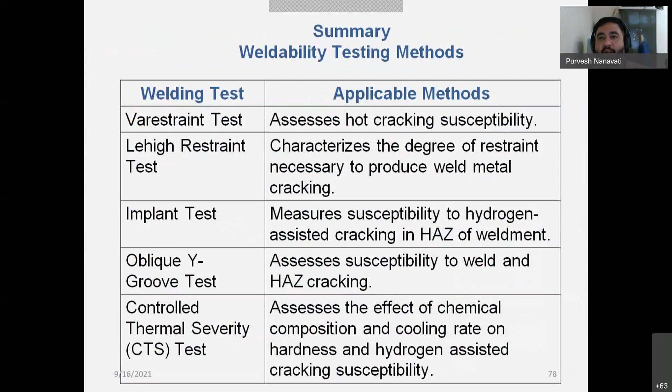Now, I have references from welding metallurgy books. These are my references, and I would recommend you read the Sindo Kou and John Lippold and D.J. Kotecki books. And one more, I attended a Gleeble weldability webinar by Emeritus Professor John C. Lippold, so some slides are also contributed by him. Credit goes to him. And these are the research papers I have as references. Most of the time, weldability tests can be found in the AWS B4.0 standard.

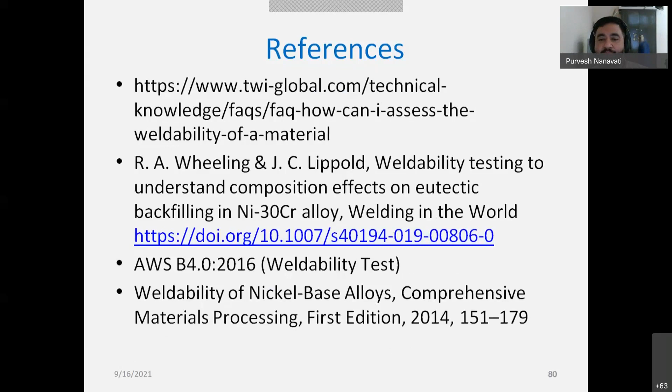And okay, at the end, I would say that one test is worth 1,000 expert opinions. Whether a particular material is weldable or not, one should not go into dispute and debate. Debate most of the time consumes the most time. So instead, it is better to go for the test, right? It's advice from anonymous.